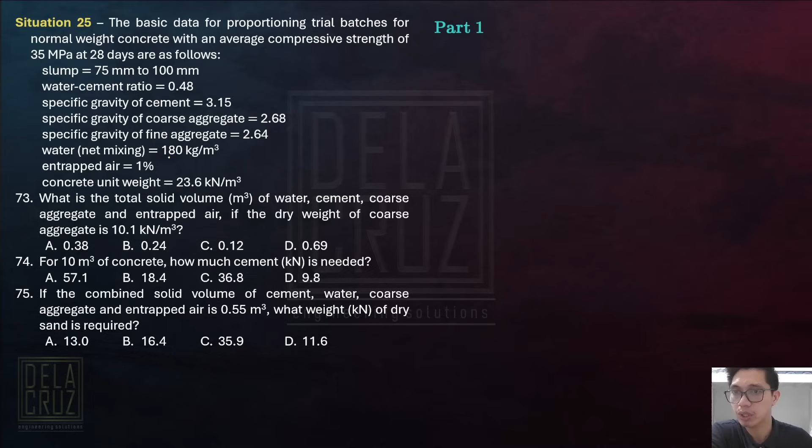The mass of water is rho times volume, density times volume. Itong 180 kilogram per cubic meters of concrete yung ibig sabihin dyan: 1 cubic meter of concrete, meron tayong 180 kilogram of water na ilalagay. So, ang mass is 180 kilogram. We are calculating per batch. Density ng water is 1,000 kilogram per cubic meter. Volume of water, ito yung required volume of water sa isang batch.

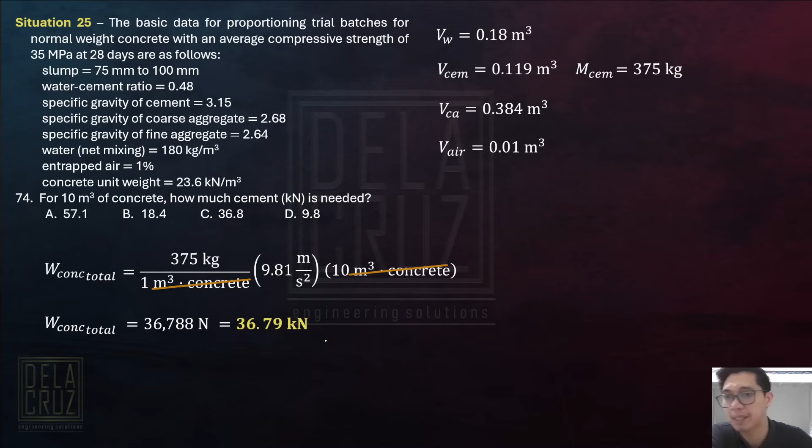Convert ko yan to newtons times 9.81, that's gravity in meters per square second. The resulting unit will be newtons. Multiply by 10 cubic meters of concrete. So this will cancel. Resulting unit is, sa 10 cubic meter of concrete, kailangan ng 36.79 kilonewtons of cement. So 36.8, letter C.

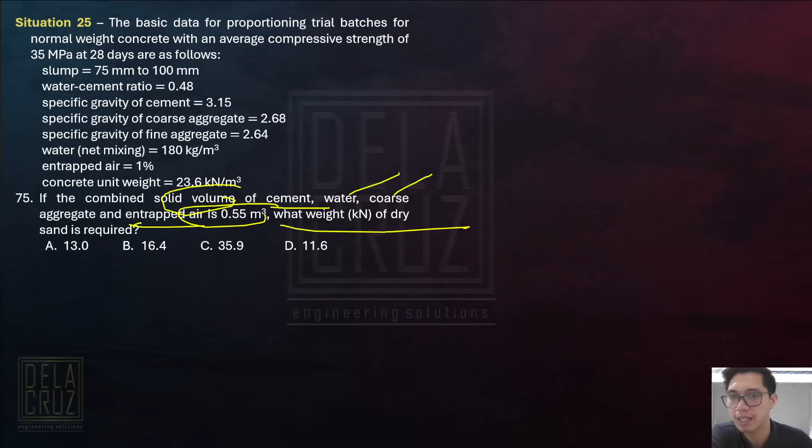Okay, then number 75. If the combined solid volume of cement, water, coarse aggregate, and entrapped air is 0.55, what weight of dry sand is required?

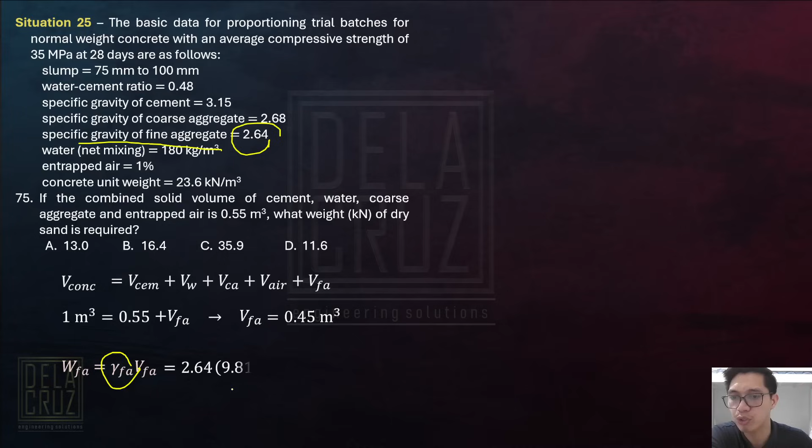Then after that, gusto natin weight, use gamma times volume of fine aggregates. Anong gamma? Specific gravity of the fine aggregates times unit weight of water times volume of the fine aggregates. Answer, 11.654 kilonewtons.